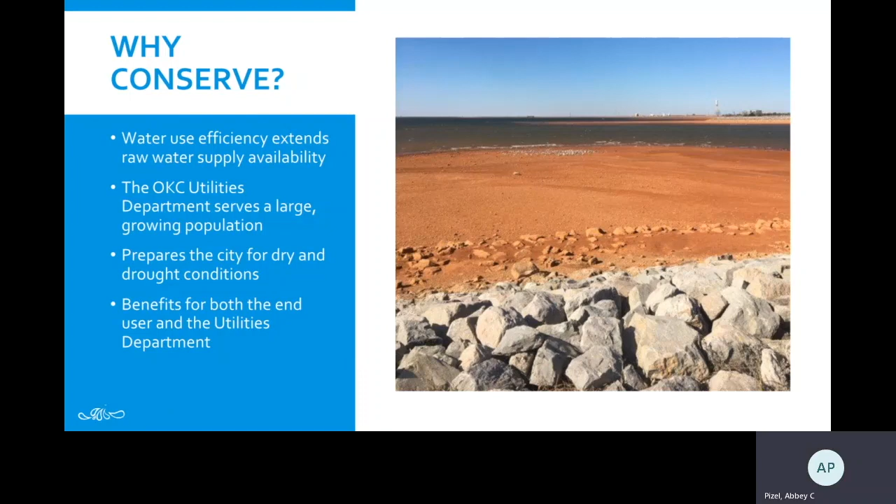The picture is from Lake Hefner during the last drought, and as you can see, the water levels dropped significantly, causing the city to begin to implement water conservation efforts to mitigate the effects of future droughts and plan for future population growth. Water conservation benefits both the end user and the utilities department.

Why is water conservation important? This graphic shows annual precipitation in central Oklahoma since 1895. The brown is dry periods and the green are wetter periods, with the horizontal black line being the long-term average.

What we see from this is that Oklahoma City experienced a longer average wet period in the 80s and 90s, but looking back further, we also have extended periods of dryness. Looking at this type of information helps us understand why it is important to employ water conservation all the time and help flatten the curve, mitigating those high and low periods so we have a more sustainable long-term water use.

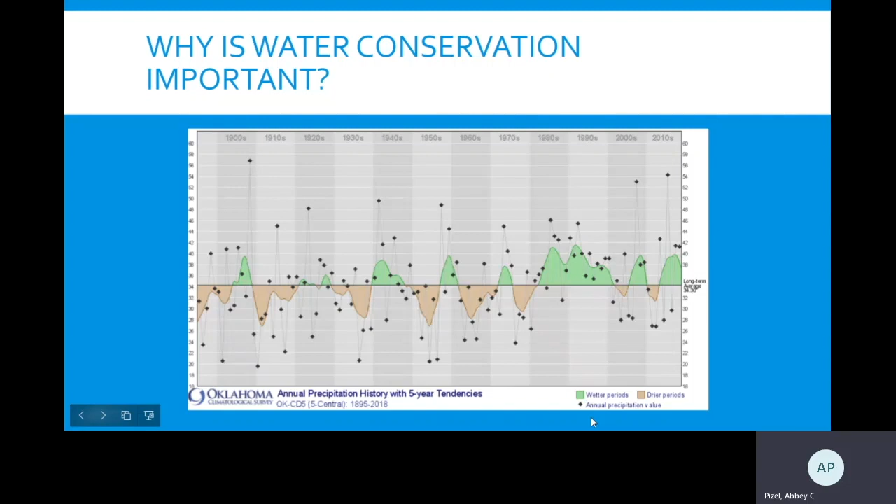The City of Oklahoma City's Utilities Department serves a large and growing population of over 1.4 million people in the metro area across 622 square miles. This means the city needs almost 4,000 miles of pipeline to deliver water to over 200,000 homes and businesses. On average, the city pumps 92 million gallons a day to serve its customers, that's over 65 gallons of water per person living in the metro area.

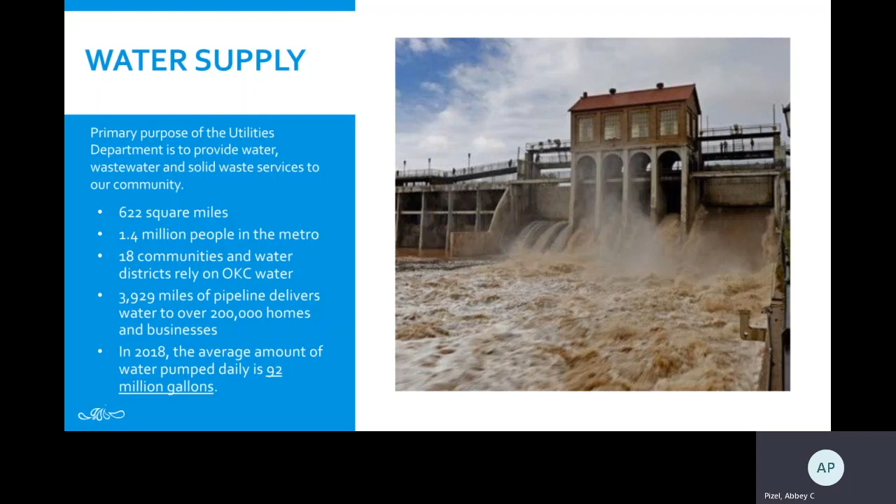But before we can understand how we can conserve water in the city and in our homes, it's important to know where our water comes from. As with many states across the West and Midwest, the majority of the water supply is in one part of the state. In Oklahoma City, primarily the southeast portion of the state, but the majority of the population is in another part of the state.

The city has 6 reservoirs across the state that store water for Oklahoma City residents: Canton, up in the northwest part of the state; Hefner, Overholser, and Stanley Draper in the central part of the state around the city metro area; and then in the southeast part of the state, Atoka, McGee Creek, and Sardis.

But we get a large portion of our water from the southeast part of the state and pump it up the 100-mile Atoka pipeline, which is the red line, to the city.

So we know that the city of Oklahoma City has a large and growing population. We know our water comes from a long ways away, and we know that weather is unpredictable.

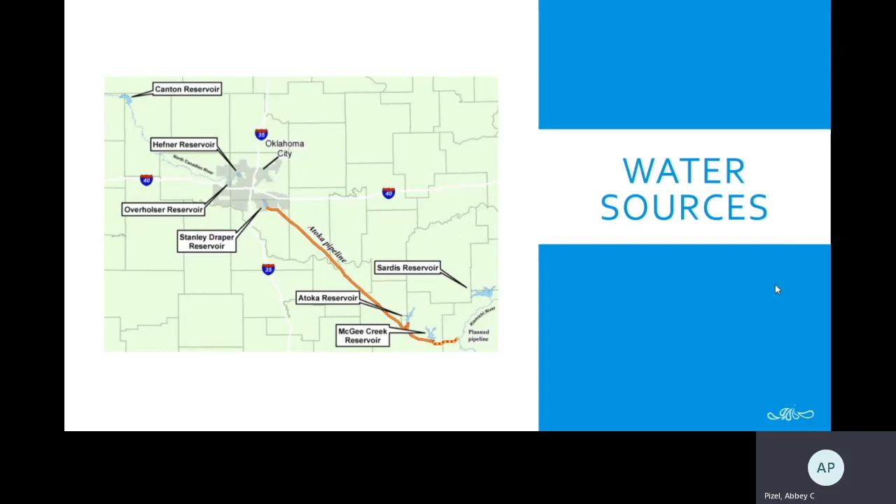Now let's see how we can use water conservation and what the city is doing to conserve water every day. These are our program priorities. The water program has 3 tiers to accomplish our water conservation goals. The first, and probably our biggest, is our water conservation education and outreach.

We do a lot of community events. You may have seen us at events like the Home and Garden Show. We do a couple events at the school, at the zoo, and then we also do workshops for neighborhood events and other things like that.

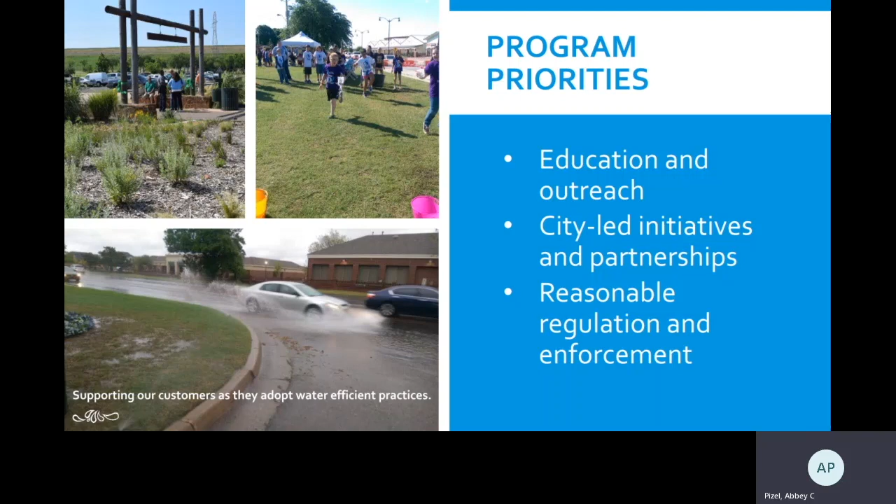We also have city-led initiatives and partnerships with various organizations around the city and the state, and then we also have enforcement and regulation when needed.

So in 2013, the city established water conservation measures to more effectively manage the demand on our system. This included a 5-stage tiered water conservation use requirements, no watering below 32 degrees, and a variance program for newly installed landscaping or seed.

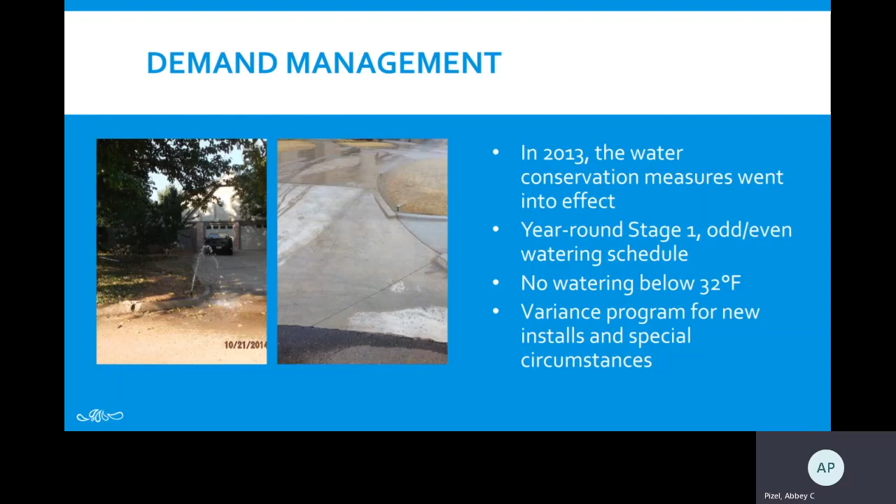If you are installing seed or turf, you can apply for a 21-day or 30-day variance to be able to water outside the limitations of the water conservation measures.

These are the 5 stages of the Oklahoma City water conservation measures. Stage 1 is mandatory odd-even lawn watering. So if your home address ends in an odd number, 1, 3, 5, 7, 9, that means you water on odd days of the week. And if your home address ends in an even number, you will water on even days of the week or month. The variance program means that you could apply to water every day for a set period of time, 21 or 30 days.

Stage 2 water measure is 2-day per week lawn watering. Stage 3 is 1 day per week lawn watering, and 4 and 5 get significantly more stringent, with stage 5 being a ban on all outdoor watering. Each of these stages is based on a combined lake capacity, and you can see the percentages over on the right side of this graphic.

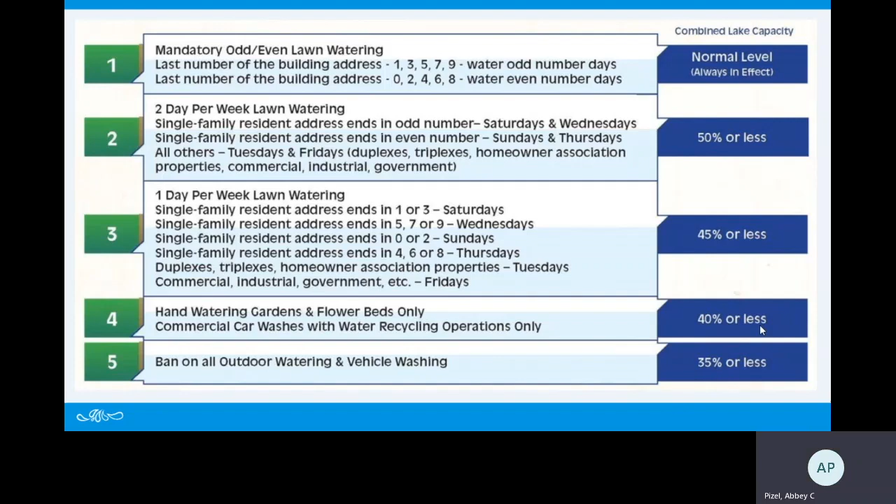But the water conservation program is more than enforcement. We do have a lot of other programs geared toward educating and recognizing water conservation efforts done in our communities.

We have a neighborhood and homeowner association sprinkler checkup program. We had an H2O Outstanding Landscape Award. We have a restaurant program. We've done median projects where we'll go and partner with a local organization to retrofit median irrigation systems. We partnered with OSU and the Myriad Gardens on a variety of things. And then we've also done bill inserts and social media to promote our messaging.

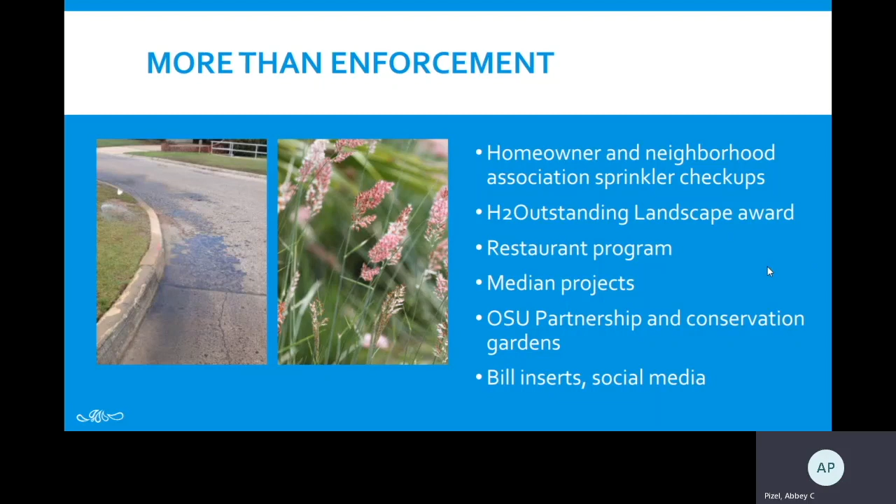I'm going to touch on a few of our programs just to give you an idea of what we do and some of the resources we have available.

So number 1 is our H2O Outstanding Restaurant Program. This program recognizes restaurants in the OKC metro area that go above and beyond to conserve water. We promote these restaurants on our website and in social media, and we also give them a sign that they can post in their windows saying that they're an H2O Outstanding Restaurant. For more information about that, you can go to our website, squeezeeverydrop.com.

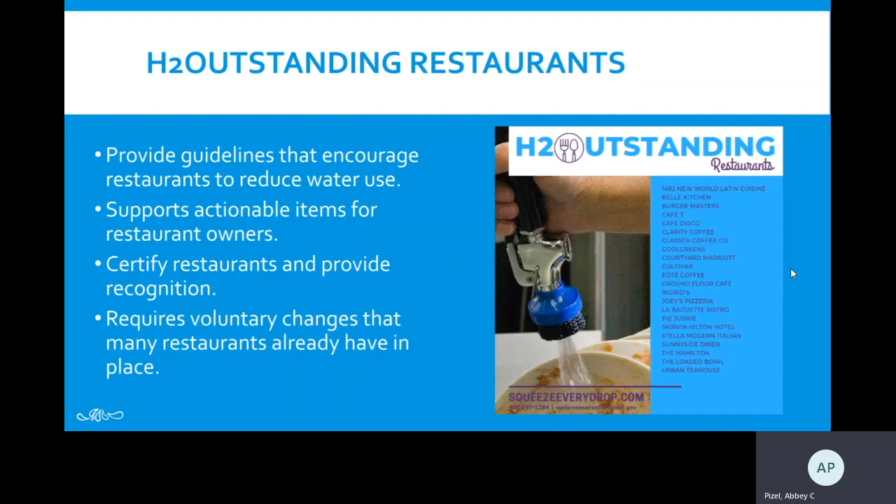Another one of our programs is the sprinkler system checkup for homeowner and neighborhood associations. This is a free service provided by the Water Conservation Program. Our team will come out and check the sprinkler system on common areas in your neighborhood. We will flag any issues that need to be addressed, such as broken heads, misaligned zones, pressure.

We will adjust your controller to maximize your watering efforts. We have seen a great success with this program with investments made to fix system issues. HOAs and neighborhood associations have seen significant water savings and money savings.

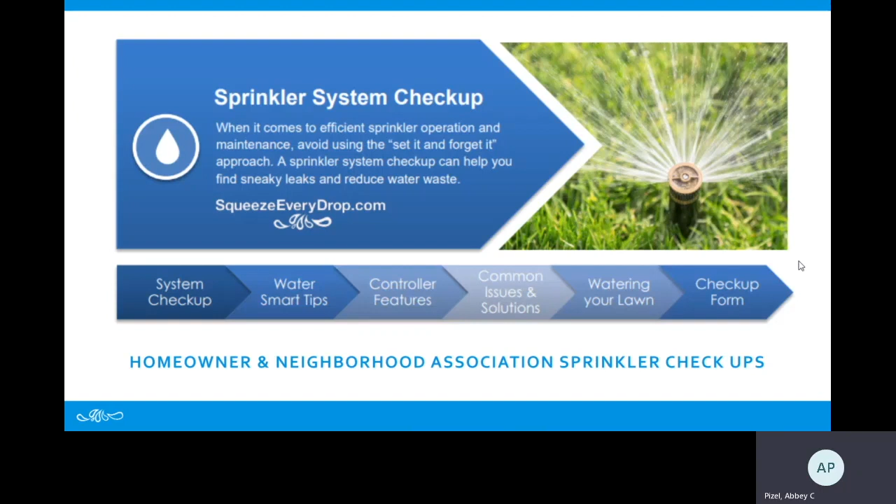Okay. We've talked a little bit about what our water conservation program is. Now we're going to switch gears and talk about household water use and ways that you can potentially save water while at home.

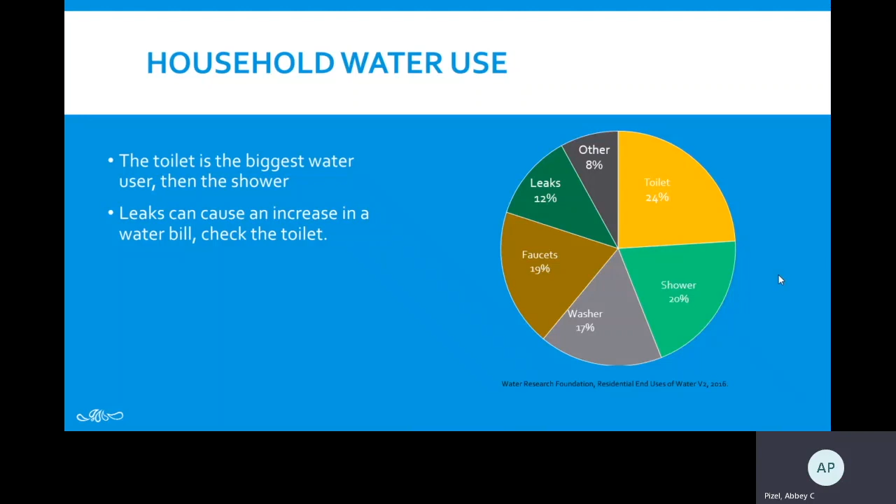This graphic shows the top indoor water users, with the toilet being the biggest, then the shower and faucets. Leaks can also cause your water bill to increase significantly, specifically the toilet, so we definitely recommend checking for leaks frequently, and we have a checklist that I will go over in a bit to show you how to do that in an easy way.

So indoor water use—probably the number one thing that affects water conservation is going to be leaks, so broken appliances or the appliance age and functionality. You might want to decide if it's time to replace or upgrade, and make sure your auto sensors are working properly. Check for leaks and repair if needed.

For example, toilets installed prior to 1994 use 3 to 5 gallons per flush, while high efficiency toilets use 1.6 to 1.28 gallons per flush, which is about a 25 to 50% water savings.

A leaking toilet can cause a significant increase in your water use, so be sure to check it regularly because you might have a leak even if you don't hear it running. Again, I will touch on in a minute how to easily check for leaks in your toilet.

When replacing old or broken products, be sure to check for WaterSense labeled products. Those guarantee a 20% reduction in water use if you install WaterSense labeled products.

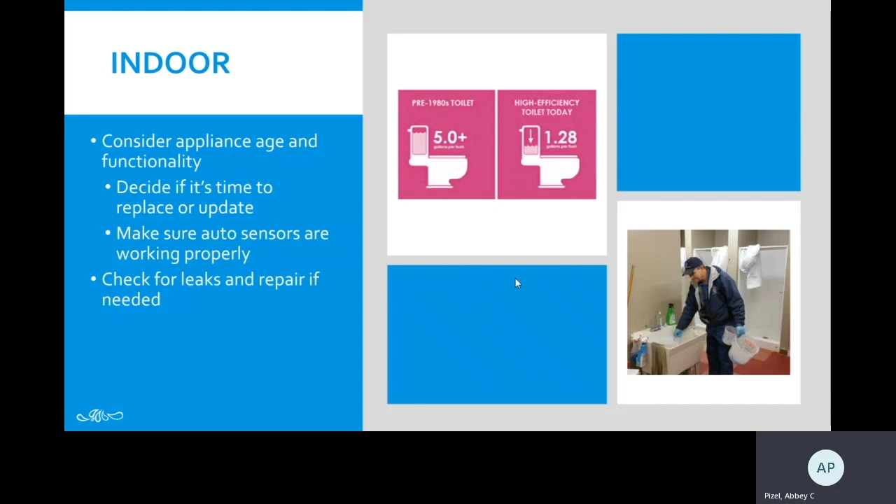Okay, moving outdoors. In Oklahoma City, we usually estimate that outdoor water use accounts for about 30 to 40% of your total household water use if you have an irrigation system.

Common outdoor water wasters can be incorrectly programmed controllers, so it's going off multiple times a day, every day. You have broken heads or misaligned zones. You're watering hardscapes—driveways, sidewalks, that type of thing—not necessarily maximizing your water use.

Also, a typical Oklahoma lawn of Bermuda grass needs about 1 inch of water per week in July. So if you stick a little rain gauge out there and measure how much rain you're getting and how much water you're applying, once you hit the 1 inch mark, you don't need to water anymore after that.

A broken sprinkler head can waste as much as 25,000 gallons of water in a season, so you want to be sure to check your irrigation in the spring and reset it, make sure nothing's broken, run through it, and then also periodically throughout the summer, and then again set it up for winter in the fall.

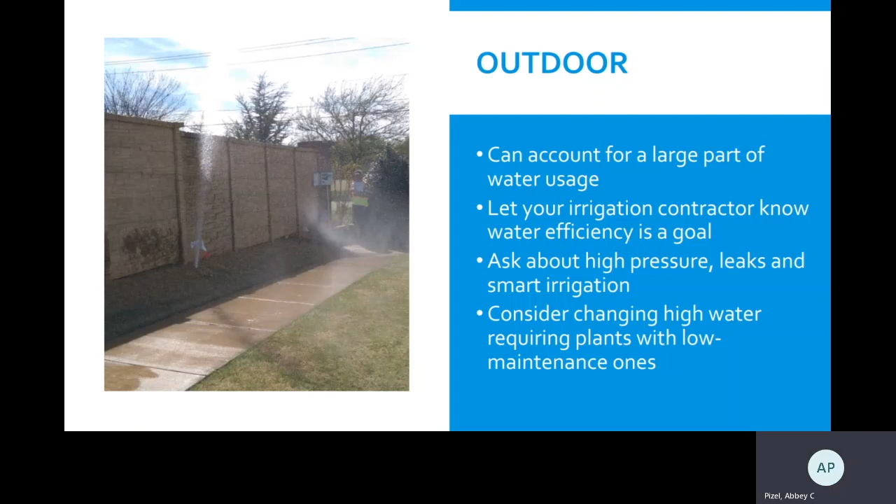Again, we have tips for how to do that, and you can also reach out to us if you have any questions on maintaining and checking your sprinkler system. We'd be happy to provide recommendations on that.

And then the last thing, this is the last little part: it's a 10-minute WaterSense challenge. This checklist is to help you find and fix leaks in your home so that you can save water and save money. We have 3 easy steps to track down leaks.

First, you're going to want to check your utility bill. On each of your utility bills, you should have a water usage summary, and it will look something like this chart, where you have the months on the bottom and your average water consumption on the vertical axis.

You can see on average if you have any spikes in water use. For example, this individual saw a bit higher spikes in January, which might be contributed to a leak, because typically in January you don't see that higher usage.

The units on the left axis are thousands of gallons. So 7,000 gallons is what we consider the average indoor water use. It might be higher or lower depending on the size of your home and the number of people living in it, but on average, 7,000 gallons is a good indicator.

If you're using in the neighborhood of 20 to 30,000 gallons, you might want to check for leaks. Then you can also read your water meter.

So you can go out at a time when you're not using any appliances in the house, not running your dishwasher or washing machine, no one's taking a shower, and look at your meter to see what the numbers are. Wait 2 hours, and if that has moved significantly, that can be indicative of a leak, whether underground in a pipe or something else. That's another way to easily check and see if you have a leak.

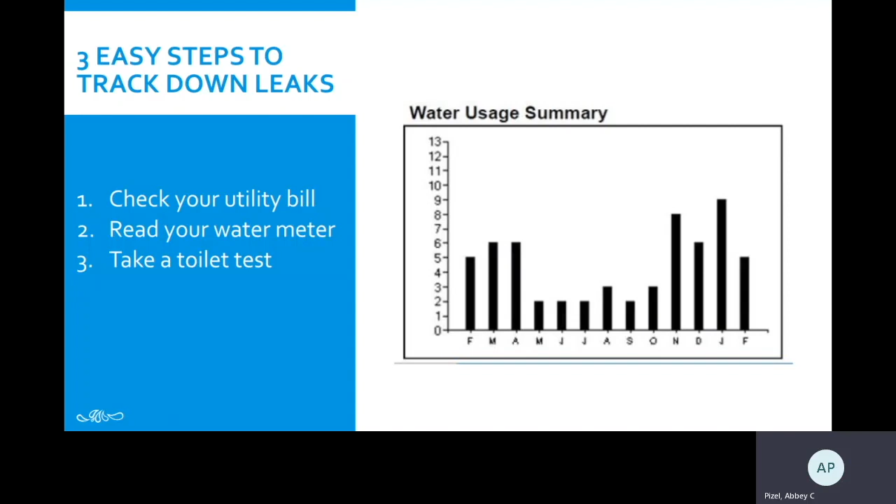In your laundry room, and don't forget to go outside if you have any spigots. If you have an irrigation system, definitely check that for leaks. Walk around your system and check all of the zones. For your irrigation system, we can provide you with a sprinkler checkup form that will show you how to set your system to run all zones, and you can run each zone for maybe 2 minutes just to see where the water is going and if anything's broken, so you can address that.

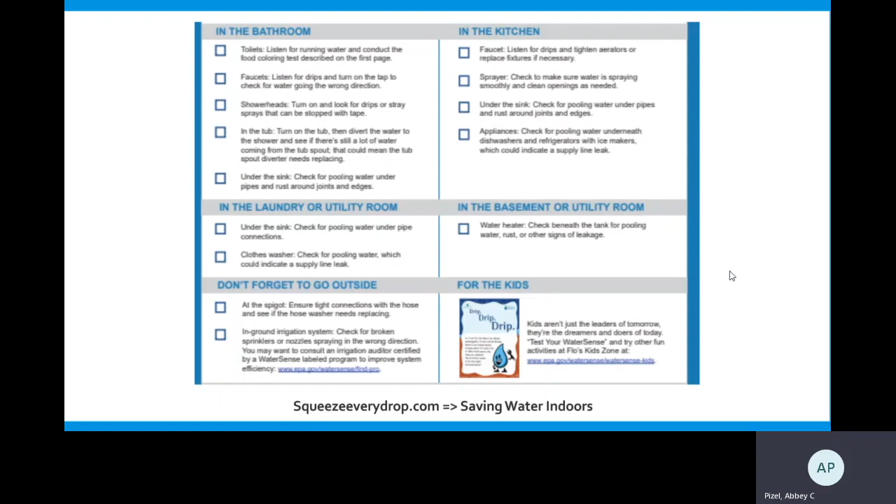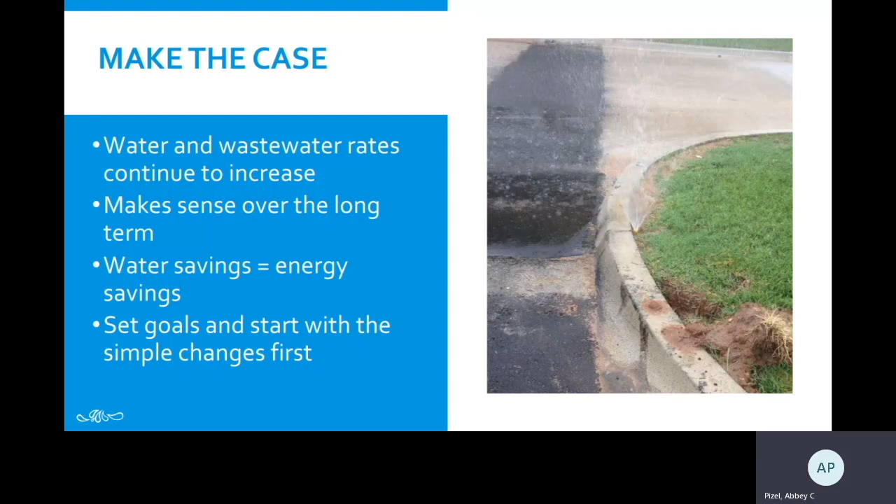Maybe whenever you have empty glasses of water, you pour them on a house plant instead of down the drain, or you thaw out meat in the microwave instead of in water. You scrape your plates instead of rinsing them before putting them in the dishwasher. All of these types of actions are easy, tangible ways to see water savings in the long term, and again, you will see money savings on your utility bills.